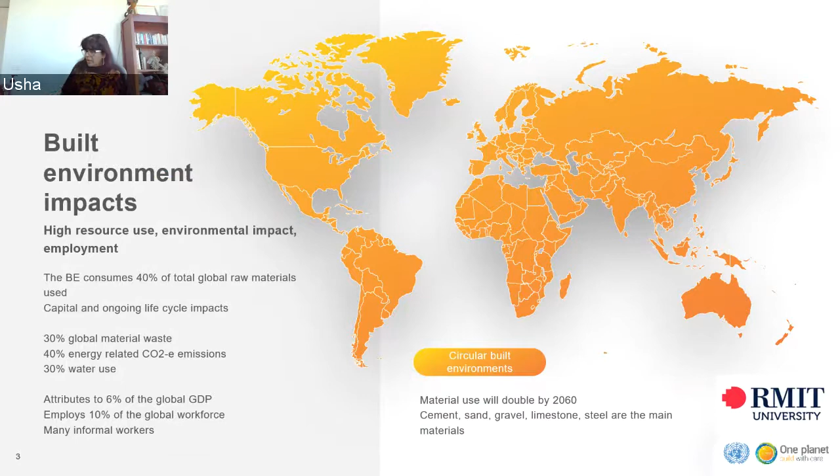So what does a circular economy actually mean? I seem to have trouble advancing my slides here. I hope you can see that now.

The circular economy is really about designing out waste, but keeping products and materials in the system that are already there, so we're not using virgin materials. I'm sure Veena is going to give you some fantastic examples of how we can use products and materials that are used in one system, reusing them into another type of system or product. The important thing here is to remember that we've just got the one planet, and therefore we cannot continue to pillage this planet that we've got.

As I said before, most of this material use is going to be in the developing regions of the world. But also, when we think about the Australian context - this was before the pandemic - the Australian population is expected to increase to 40 million by 2050, and there is going to be a mix of greenfields, brownfields, and greyfield developments. If we continue to build cities the way we have, horizontally rather than vertically, we will also be responsible for a large proportion of primary material use in the Australian context as well.

But if we were to move to adopting a circular economy lifestyle, what are some of these advantages? Clearly, the advantages are that we will not have to rely on production, consumption, and manufacture of materials through virgin resources, and this will assist us in eliminating environmental impact. But more importantly, it's also supportive of local growth, local jobs, and local economies.

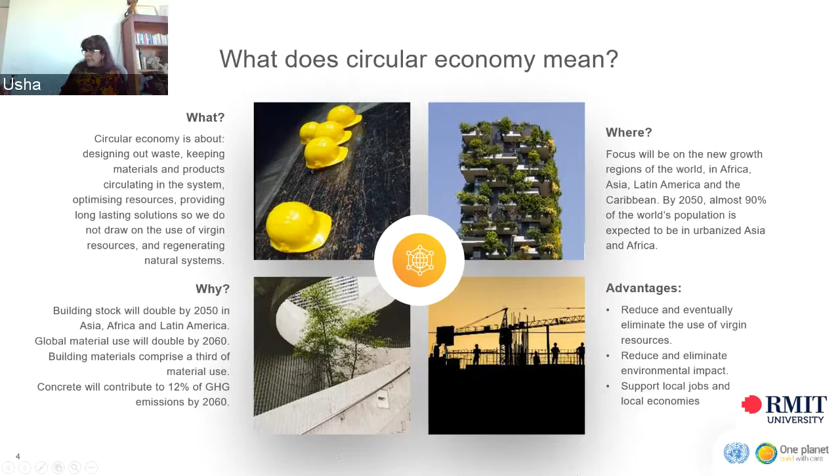There are many options available when you think about the built environment sector. Some of these options are mandatory, some are voluntary. Some of the mandatory options, for instance, are tying in with building codes, building regulations, various assessment schemes that arise out of the building codes, but also have been driven through voluntary schemes in the marketplace.

Nationally determined contributions, which is a reporting mechanism by countries through to the Paris Agreement, is another area, and Australia hasn't quite signaled the importance of the built environment in this, but the recognition of reducing impact of the built environment is certainly part of Australia's NDC reporting.

It's also important to start thinking about policies. Some of the measures towards low carbon economy, towards the use of efficient processes within the system, towards thinking about procurement practices, particularly by governments, thinking about what Australia is going to look like in a zero waste economy or in a low carbon economy.

These are all some of the things that are really important when we start thinking about some of the mandatory top-down driven measures. Voluntary options are often, at least in the Australian context, led by industry peak bodies, but there's also an increasing demand now coming from clients and consumers, and particularly the millennials and Generation Z are very conscious of the impact that we as humans are having on the planet.

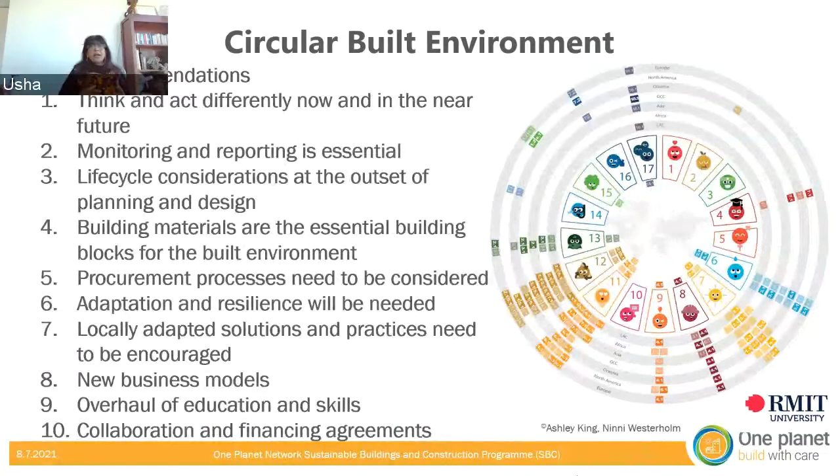And to support all this, also the importance of financing arrangements, new ways of sharing opportunities, new ways of financing, moving away from the old design, build type of models, particularly for the built environment.

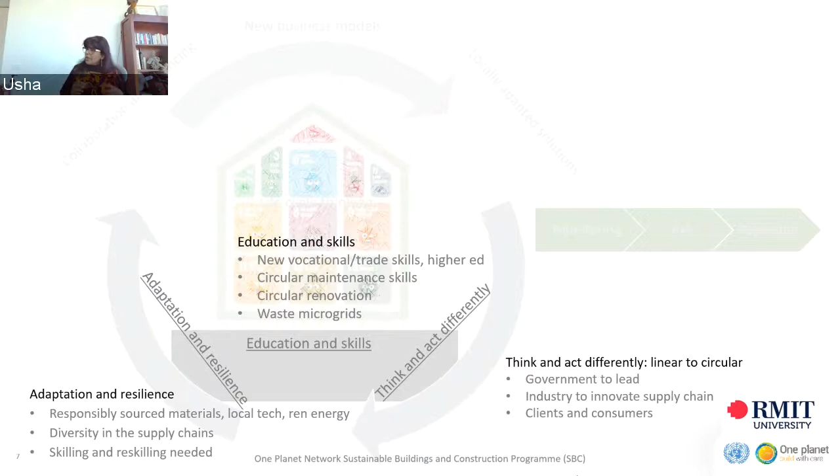I'm just going to run through these very, very quickly because I'm running short on time. So some of the things that point to or need to be considered when we're thinking about systemic change, moving from linear thinking to circular thinking, are around supply chains as well, thinking about how do we engage clients and consumers within this process, but also thinking about some of the leadership that governments can show us in the process.

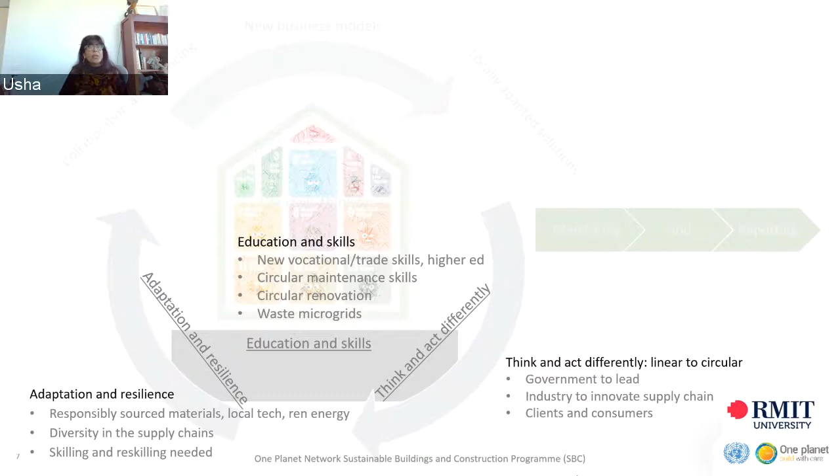In terms of adaptation and resilience, the role of how we tackle climate change, how we tackle people's responses to climate change, and the role that people can play in the process is just as critical. And this brings us to the importance of skilling and reskilling. This may happen not just at a vocational or higher education level, but it also needs to bring in professional development opportunities across the different disciplines that make up the built environment. And also starting to think about more of a repair culture rather than a throwaway culture.

In terms of life cycle thinking, I've talked about the importance of thinking about the full life cycle of buildings, but within this, the importance of new educational opportunities and reskilling people within this process is critical. And so turning attention towards new jobs that would be in the green building space, in the green skill space, is critical.

In terms of materials and the role of materials, it's really important to start thinking about bio-based materials, about using a cradle-to-cradle type of approach. So again, we are not using more chemicals within the process, so it's easier for us to reuse these materials at the end of their useful life.

In terms of procurement practices, again, moving the ownership models of owning into sharing. So for instance, companies that would be coming in and putting solar panels on your roof and taking responsibility for maintaining these solar panels - you don't actually own them, but you come to an arrangement of working with these companies to set up these systems and they take responsibility for ensuring that the panels work. There are examples of this already in Europe and in the Americas.

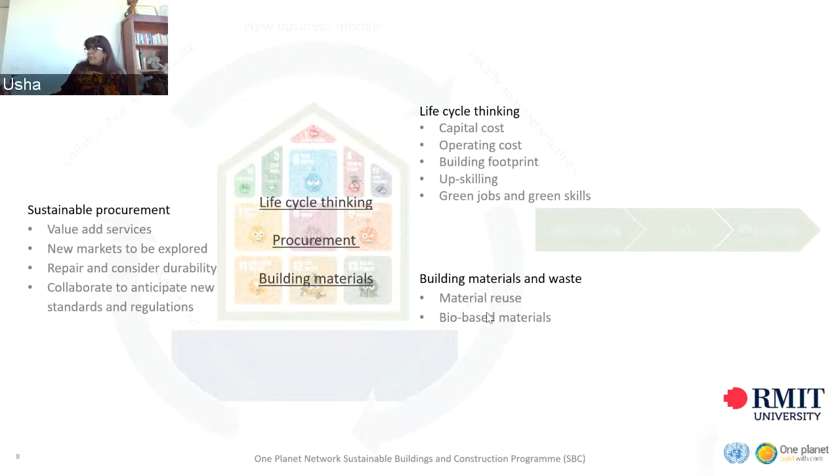And then in terms of locally adapted solutions, thinking about how we can support the local economy - this repair culture, the sharing culture, what role do new jobs and new opportunities create within that space?

And this, of course, lends itself to new ways of business collaboration, financing, and bringing in new ways of working - some of which we've already seen, like virtual ways of working - thinking about procurement models within this process as well. And the role of monitoring and reporting in this whole process is quite critical, because we need to start thinking about the Sustainable Development Goals as great indicators to enable us to get to where we need to go in the future. So, using this backdrop of the SDGs to start thinking about which of those SDGs will assist us in this journey.

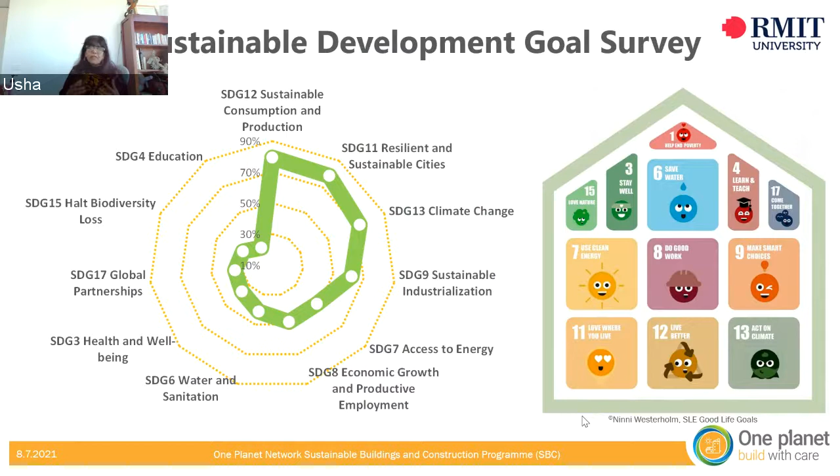The importance of SDG 15, which is about biodiversity, is also key. As we build more, we're actually taking away biodiversity, changing the landscape and the flora and fauna within it. This is a huge issue as we use more and more greenfield developments. And of course, there's the role of education in the process.

This exercise delved further into what those indicators were. There were 4 core indicators, actually 3, because 8.4.1 and 12.2.1 on material footprint are the same indicator across target 8 and target 12 within the SDGs. The role of recycling was considered really important, that's 12.5.1, and the use of local materials, particularly in housing, which refers to indicator 11C1 under SDG 11.

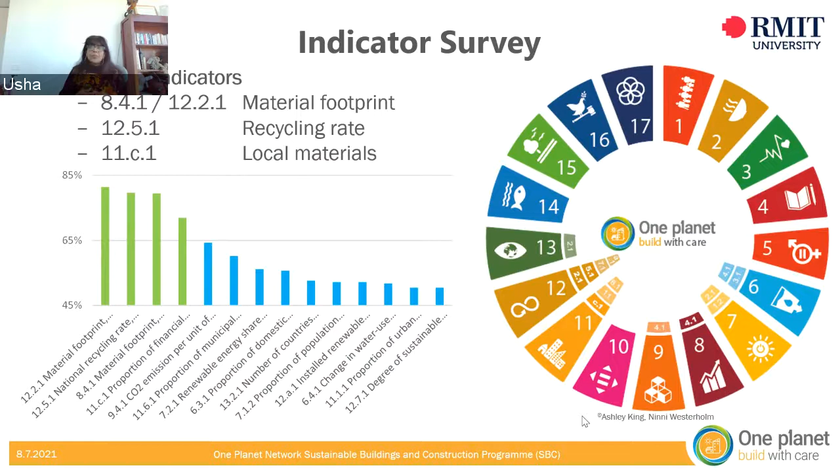As I said before, there's a whole host of other indicators relating to energy (SDG 7), water, the role of partnerships, and the importance of carbon dioxide emissions. These are the 10 secondary indicators, which I won't go into in greater detail, but again this signals the cross-cutting areas of the SDGs that are really important for us to consider when thinking about the built environment.

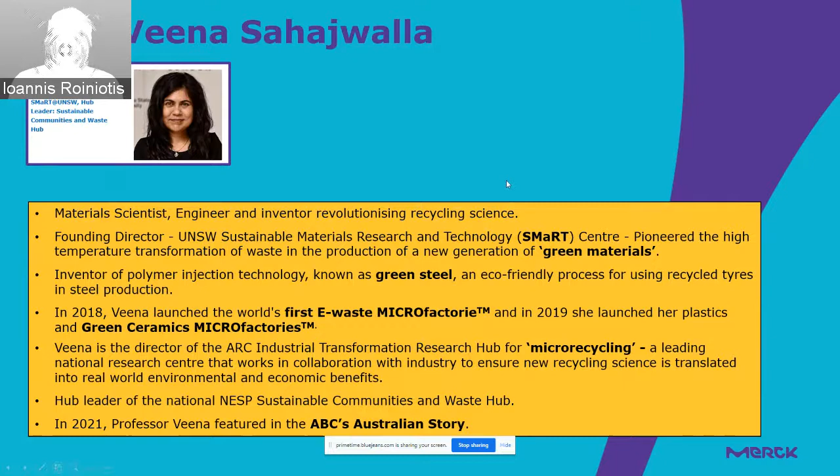What we're showing the world is that if plastic waste from e-waste can be transformed into a really useful consumer product like spectacles, then there are endless possibilities. One of the big worries with recycling in Australia is a lack of trust about what's actually happening to it. Having products that can be felt, tangible, and worn on the face shows people that their recycling is going somewhere, and we are finding solutions for it.

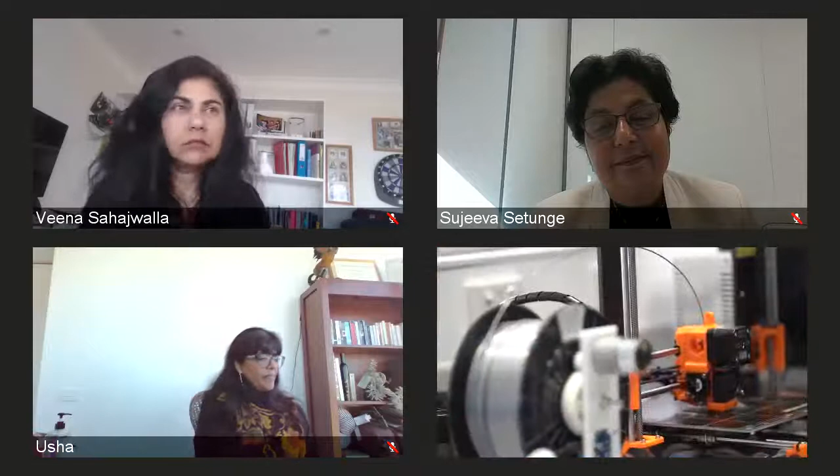The fact that we can produce these beautiful, high-quality plastic filaments out of waste and use it for printing means we're opening up a whole new economy, where microfactories become part of the supply chain, creating new products out of recycled materials. The opportunity is massive, and if we can get it right, e-waste is really critical, because if we can solve all the problems with that, we can solve a lot of other downstream recycling issues.

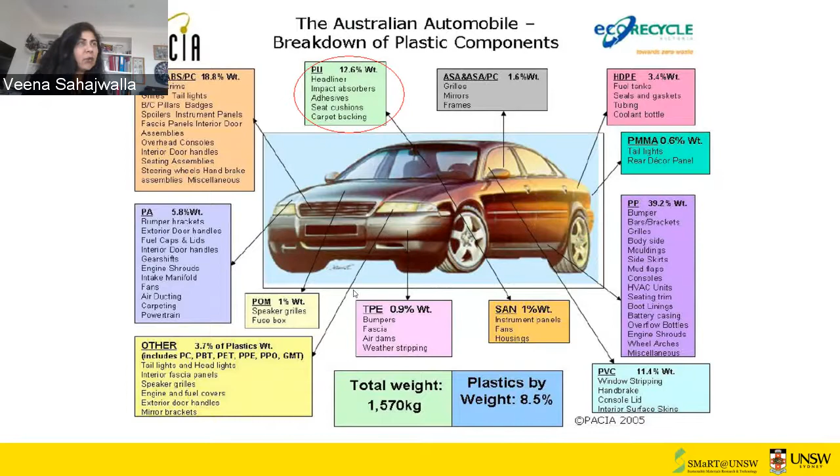we're looking at using, for example, waste tires in the process of making steel, using different kinds of materials like plastics that I was talking about coming from cars and electronics, and using that for remanufacturing. We've also shown that we've got complex mixtures of materials that allow us to reflect on where these waste materials can be utilized.

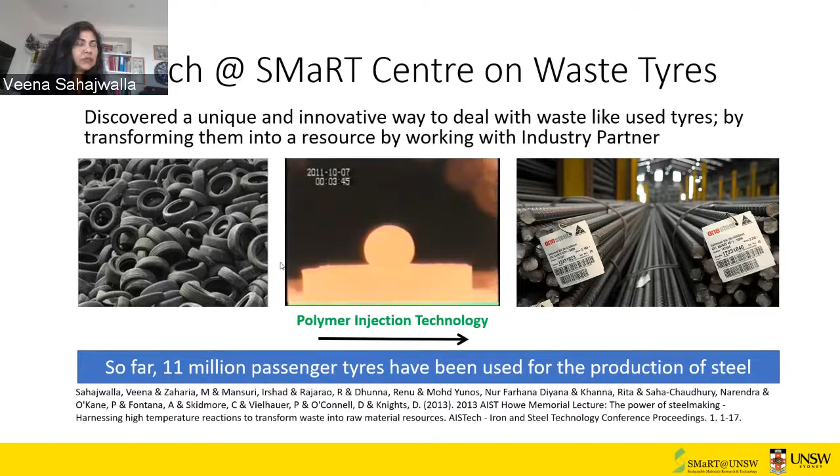So if we're talking about processes like what we're doing now with green steels, we're showcasing that we can use materials like tires and different kinds of complex plastics in the process of making all kinds of products that we've talked about here. So it's really about ultimately showcasing that we have to go beyond that traditional thinking of the 3 R's of reduce, reuse, recycle, because our wastes are complex.

Whether we're talking mixtures of different kinds of plastics, glass, rubber tires from cars, or different kinds of plastics, metallics and glass-based materials from our electronic resources, we need to reimagine how our products can be used in remanufacturing. This is where, for us, the exciting future has been over the last many years at the SMaRT Centre, showing that waste can be converted into value.

Which means we've got to look at all kinds of high-value products, and our consumer needs are going to change with time. The needs of our building industries, electronic industries, all of that will change with time. It's about being very flexible in the way we look at remanufacturing, but also recognizing that the input feedstock, if it comes from waste resources, can be put into remanufacturing to meet the requirements of end users.

So, if we're talking about things like e-waste, of course, our circuit boards are very rich in metallic resources like copper and tin. We know that the world has got plenty of these resources. It's about how do you transform them in a way that you can do it not just in a traditional way of putting it into a smelter, but rather looking at how we can develop decentralized small-scale operations that

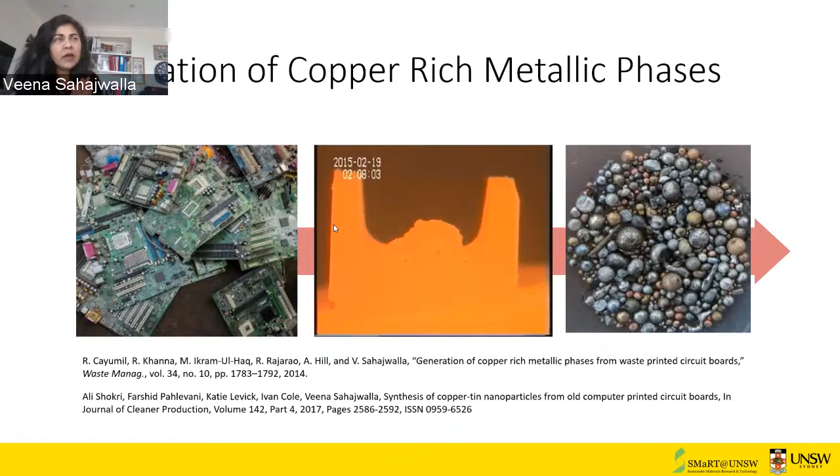This is where a lot of that conversation around energy storage comes in, what happens to a lot of batteries, for example, products like lithium-ion batteries. We know very well that they are extremely useful and contain very useful materials, like cobalt. So how do you harness these kinds of batteries in the production of important elements?

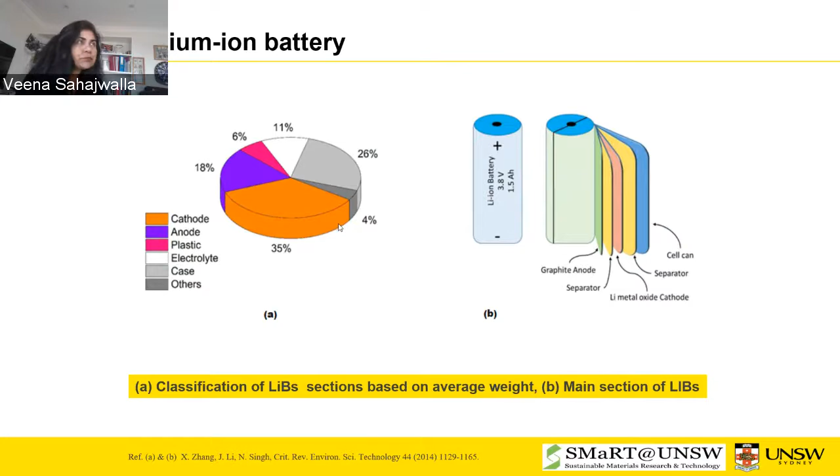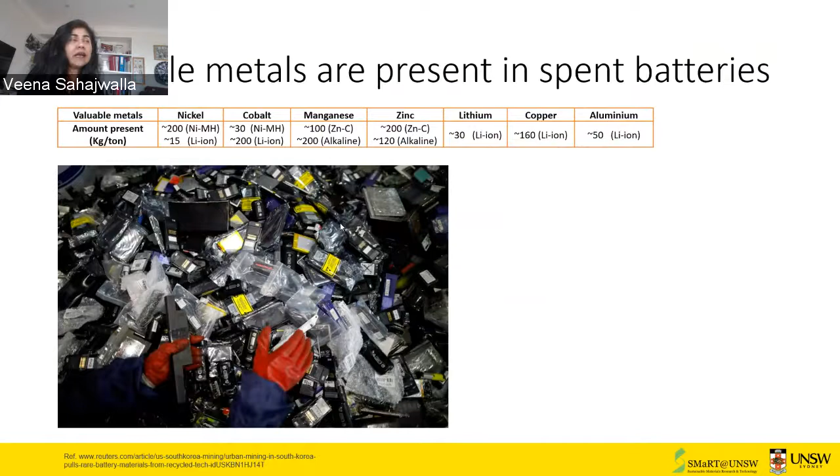I'll skip through a lot of these slides just to give you a sense of the fact that lots of valuable materials are really sitting at our fingertips in the form of different kinds of batteries, for example.

The SMaRT Centre really is all about taking that fundamental science, and we need to understand how recycling and materials transformation is going to play an important part, which means new recycling science has to be developed. We can't always assume traditional methodologies are going to work, particularly when we're talking about highly valuable materials feedstock right down at the micro level, whether present in our circuit boards or in our batteries.

We need these new technologies so that ultimately we can harness those materials. Micro factories and new recycling science, like micro recycling, provide that scientific and technological foundation, and those advances then enable us to achieve a greener future where we are very conscious and mindful that our materials really are finite resources.

Whether we're talking about electronic devices or just about all other things as part of our resource opportunity, including simple things like waste textiles, we need to be mindful that we need to ultimately deliver some of these solutions. And of course, green manufacturing and the work we're doing in this space is important.

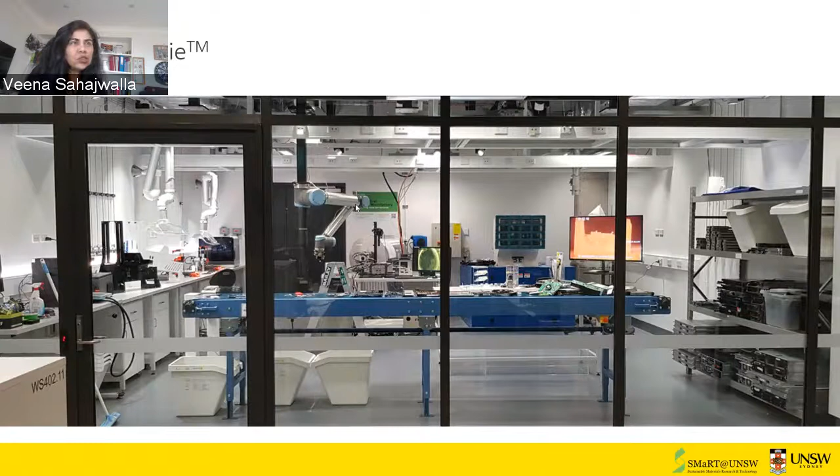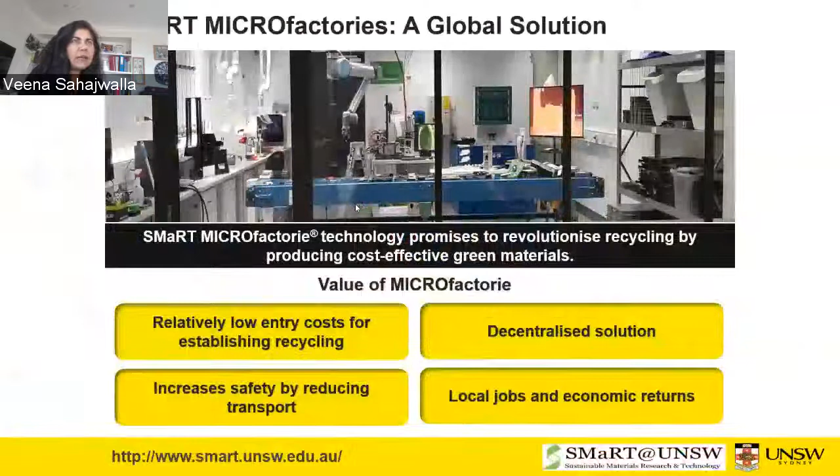I wanted to wrap up by showing you some pictures - I'll skip through some of these slides, but just to give you a sense of where these microfactories are. We've not only commissioned them at UNSW over the last few years, but this year have also launched our green ceramics microfactory outside UNSW in a regional town called Cootamundra. These facilities are enabling us to produce all kinds of products.

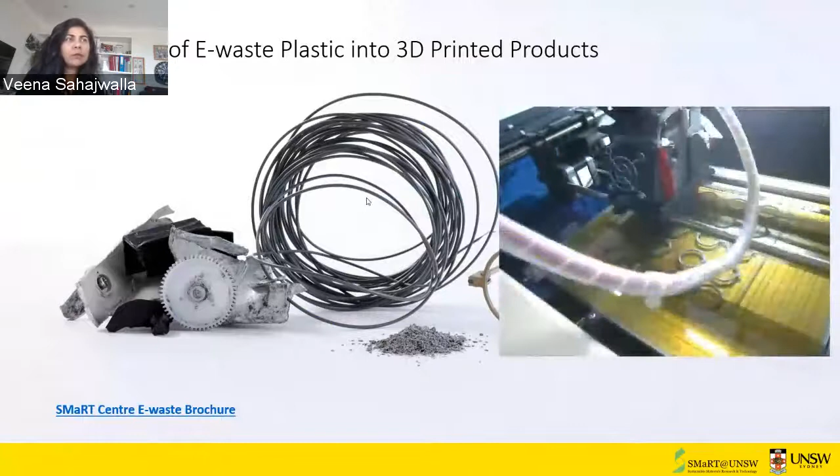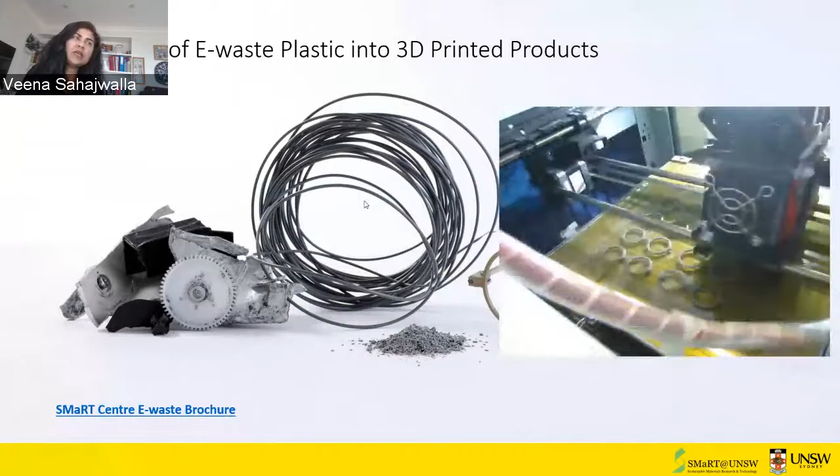Examples of what we do include simple solutions around conversion of plastics into 3D products that I was talking about earlier. All of that is feasible depending on the end market, but it's very much about customization, about creating what I like to call an EVP, an engineered value-added product, depending on the needs of our societies.

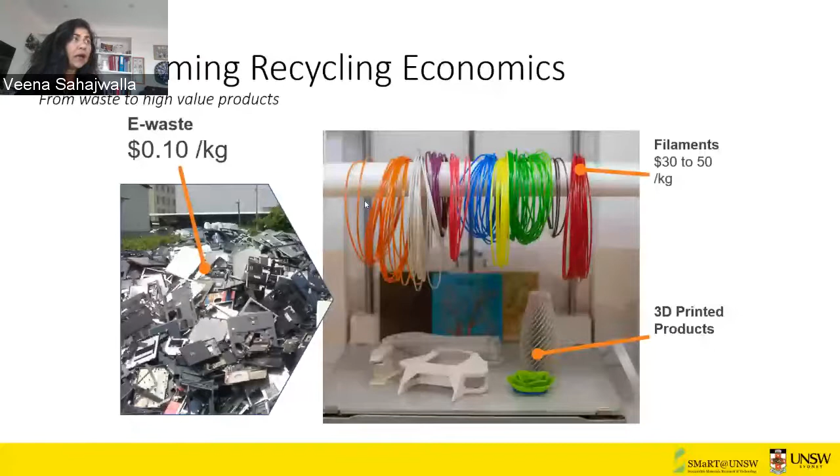So these are some of the solutions I've talked about, but I also wanted to leave you with a few pictures. Our pictures here reflect panels that contain, for instance, glass and textiles, and creating these green ceramics means you can actually put that back into end user application.

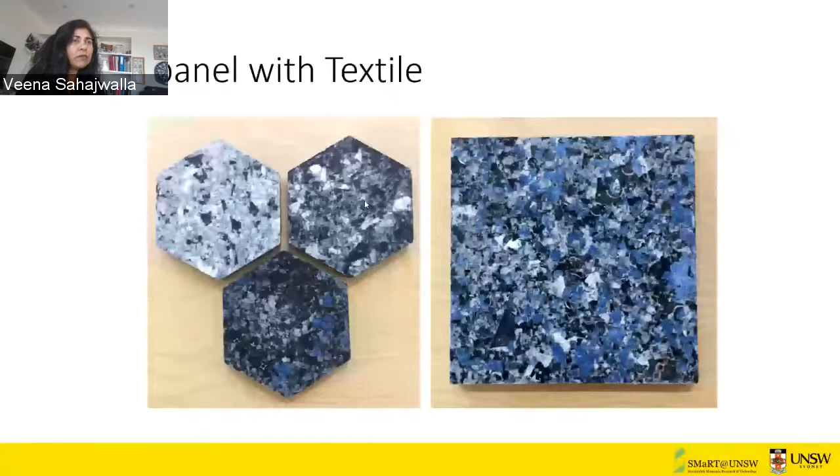Our collaboration with Mirvac, which we've released into the public domain this year, and some of the documentaries and work that ABC has showcased, shows that we can put these into actual applications - an apartment they've launched this year with products made from green ceramics. You see floor tiles, island bench bases, kitchen splashback, and wall tiles.

Look, I'm conscious of the time. I'll leave it at that, and certainly leave you with a real positive hope for the future, recapping that UN SDG 12 of sustainable consumption and production is very much possible. So thank you very much for this opportunity, and I'll hand it back to you, John.

Thank you, Veena. Thank you very much. I think everyone in the apartment business will be glad to use some of these recyclables, and it's timely. It's very timely. I'll just move on to our next speaker, our third and final speaker.

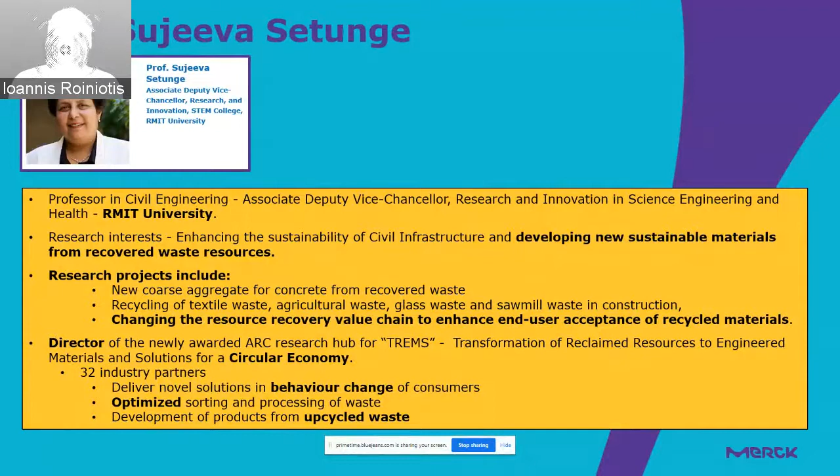Professor Sujeeva Setunge from RMIT University. Her research interests are vast, enhancing the sustainability of civil infrastructure and developing new sustainable materials from recovered waste resources. One project I'll highlight is changing the resource recovery value chain to enhance end user acceptance of recycled materials - changing everyone's mindset of accepting it. She's Director of a newly awarded ARC Research Hub, TREMS, working on the circular economy, with 32 industry partners delivering novel solutions in behavioural changes, optimising sorting and processing of waste, and developing products from upcycled waste. Again, keeping with our theme of a greener future. So over to you, Professor Sujeeva.

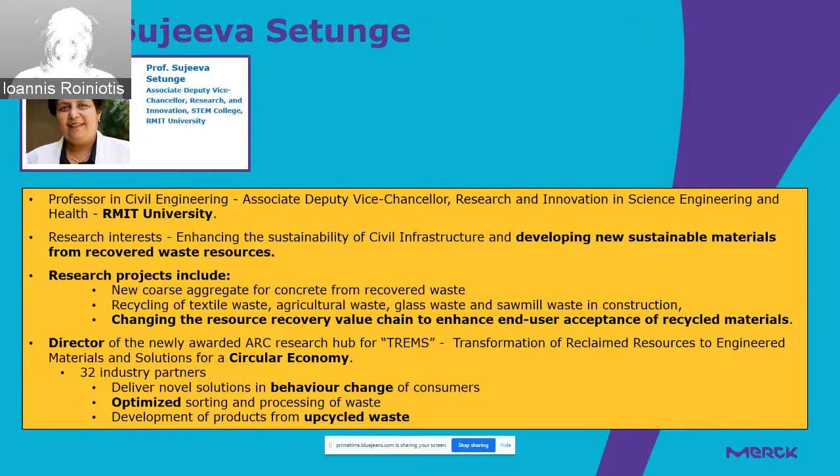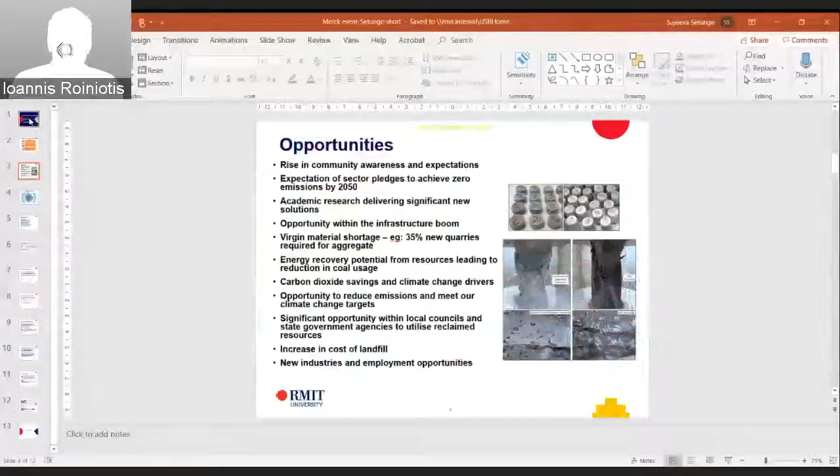You're on mute still. Over to you, Professor Sujeeva. You're just on mute, so unmute yourself and proceed. Can see your screen. We lost your screen. Go for it. Unable to see your screen. There we are. Yes, okay, can you hear me now?

Thank you, everything's perfect. Thanks, John, and thanks very much to Merck Group for organizing the Greener Future event. This is a fantastic initiative, and also great to hear from the first two speakers who have set the scene very well. So I'll move on to the topic straight away. It's really fantastic to hear the high-level overview from Usha about the global scene, and also from Veena about the scientific innovations and the great translation activities happening in the e-waste and plastic waste space.

So I will be covering the broader scope of resource recovery and circular economy challenges. My background is as a civil engineer covering the built environment and construction sector, where the need was clearly identified and presented by Usha. So we have a huge opportunity and also an issue.

Some of the challenges we came across - we ran 6 engagement events with industry in developing a comprehensive research program. Some of the major challenges identified by industry are the lack of knowledge about the volume and scale of the problem in detail, gaps in policies which Usha also touched on, minimizing waste and stakeholder responsibilities, effective tracking, collecting, sorting for a planned end use. So we have multiple opportunities for resource recovery and new solutions - what do we select, and the markets, loss of markets.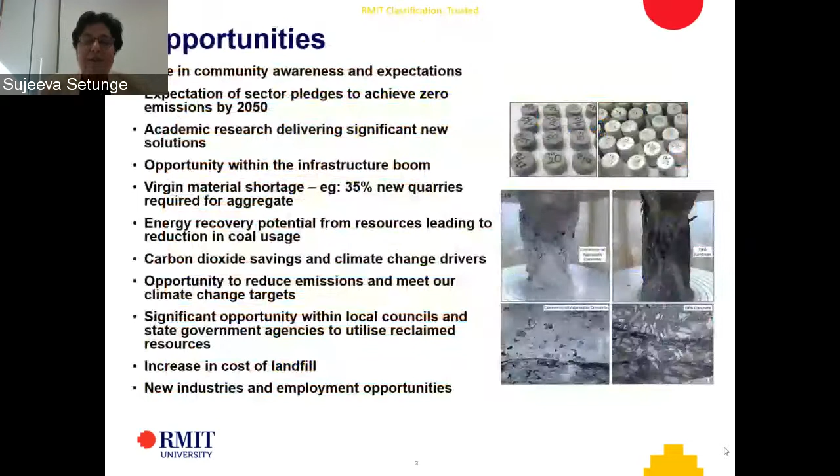There are emerging changes. We understand there will be newer challenges happening in the near future with export markets being reduced. Then you have environmental issues, leaching, environmental hazards associated with waste, lack of business models. So you can develop solutions and translate them, but how do we create a business model for the new product or solution? And then cost-benefit tools and enablers to ensure we have a circular solution translated well and implemented.

So when we started, we looked at the opportunities available. There's significant academic research delivering new solutions. If you look across the research space on this topic, you see so many solutions being developed. However, what we noticed is that the translation is very slow, and it's a huge credit to Veena that she has taken this to the full value chain, delivering market-ready solutions to the e-waste problem, and it's really fantastic to see the acceptance.

What we were finding is that in the construction sector, for example, geopolymer concrete, where we replaced cement completely with other additives, has taken 15 to 20 years to penetrate the market. Even when it has done that, the actual cost of the product is about 40% higher than normal concrete. So how do you compete in that type of situation?

However, there are opportunities. There's significant community awareness and expectations. All sectors have pledges to achieve zero emissions by 2050, an infrastructure boom, and whenever there's economic stimulus required, we see significant investments in the infrastructure built environment sector. So there's a huge opportunity for resource recovery and circular economy in the sector, and there's a virgin material shortage - for example, 35% new quarries will be required for aggregate.

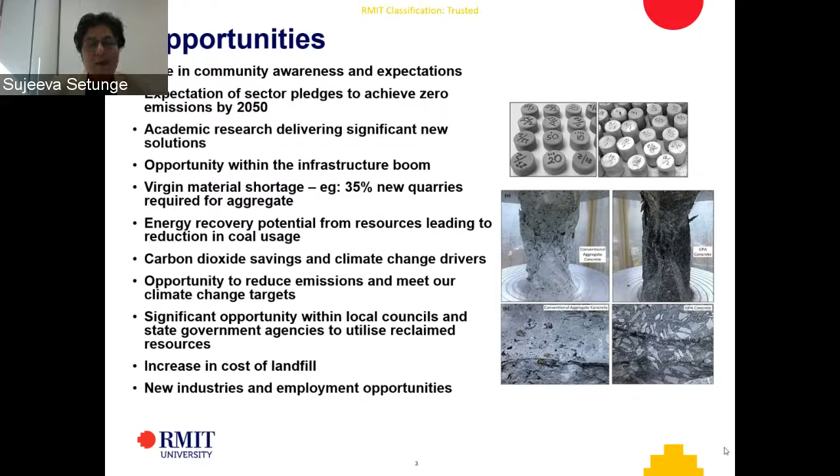So there's energy recovery potential from the resources recovered, which goes into reduction in coal usage. So there are a lot of opportunities which encourage recycling.

Considering all these, we developed a research program which covers 5 main themes. Theme 1 covers social change and smart design to minimize waste. Theme 2 is on processing, supply chain, and waste to energy. The third one covers solutions development, which is the space we have been working in for the past 10-15 years, developing solutions from recovered waste for applications in the construction sector.

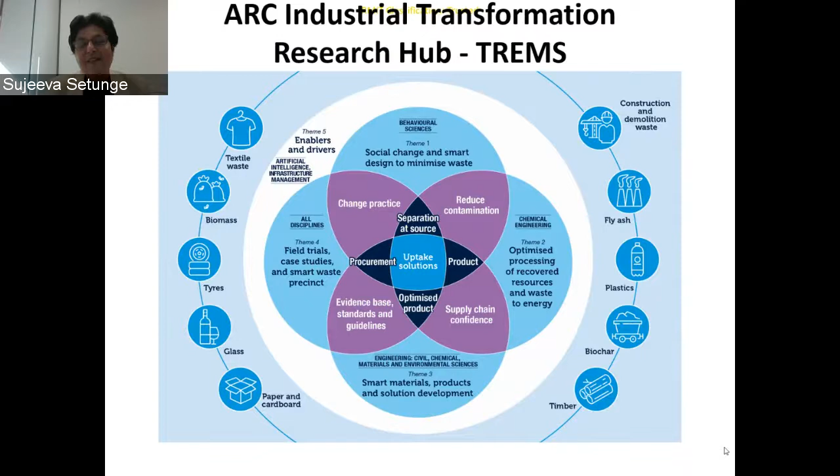Then we have a 4th theme where you do field trials, case studies, and then a 5th theme which covers enablers. You can see the benefits of the interconnected themes. When you look at the changing behavior and the intersection between processing, you see the reduction in contamination, which will enable easier recycling and upcycling of materials. Similarly, the social change and field trial intersection enables change of practice. So you can see the benefits of intersection of different themes.

Based on this, we have developed a research program in partnership with 9 academic institutions, and I'm pleased to say that Veena's team is a participant in the program as well, and Usha is a key CI from RMIT. We have 9 Australian academic partners, and 4 international partners, and we do have industry partners covering the whole waste recovery value chain, local government to private industry and peak bodies.

This has given us a fantastic opportunity to develop a research program which actually enables us to minimize waste. The first step of this is currently underway. We are developing a collaboration platform to track waste and material flows, working with 5 local councils who are key partners of the program.

We are also following on with some experience of Usha's team, where circular economy pilots have been conducted with local councils in other sectors, moving into the construction sector and looking at C&D waste, and also reuse of materials in the construction infrastructure sector from different waste generated from different parts.

We are also looking at policies for waste recovery, looking at what has worked internationally and how can we bring some of these into local practice, and how do we change behavior of consumers, what are the most effective practices, and then how do we develop smart tracking and waste collection methods to enable recycling and upcycling.

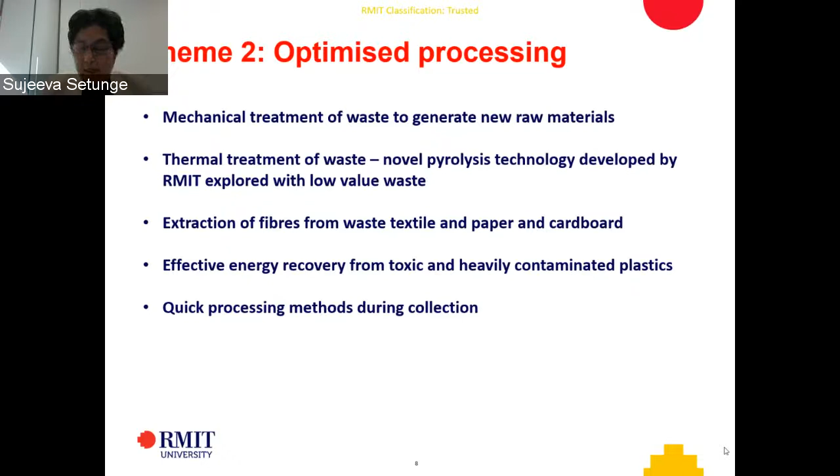We also have a fantastic new example where we have delivered a pilot plant of a pyrolysis technology developed by RMIT to convert low-value waste into energy with a low energy consuming process. Extracting of fibers, shredding, and some of these things we now also cover in our microfactory where it is already happening quite well.

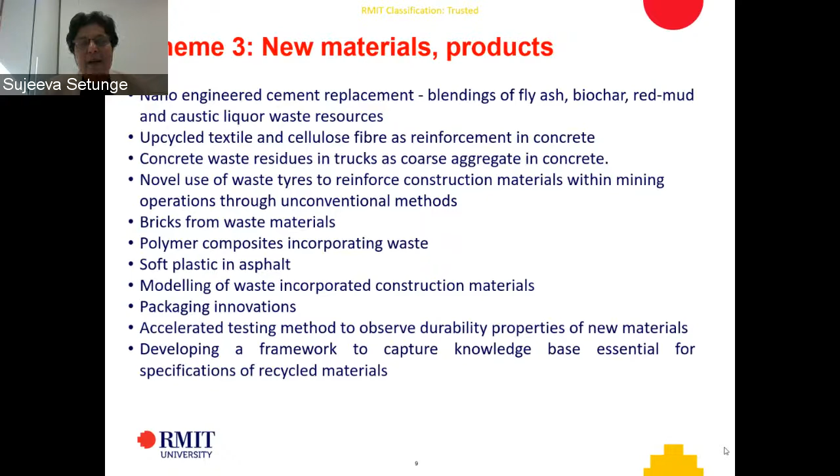In terms of new materials products, this is where our strength is. When you look at the 9 academic partners, we have 20 or so solutions which are developed at the laboratory scale, ready for that next stage of looking at field trials and case studies, which can be conducted in partnership with local council partners, and then developing enablers and tools which can quantify the benefit of using these materials to the consumer, enabling the translation and take-up of the solutions that are being developed.

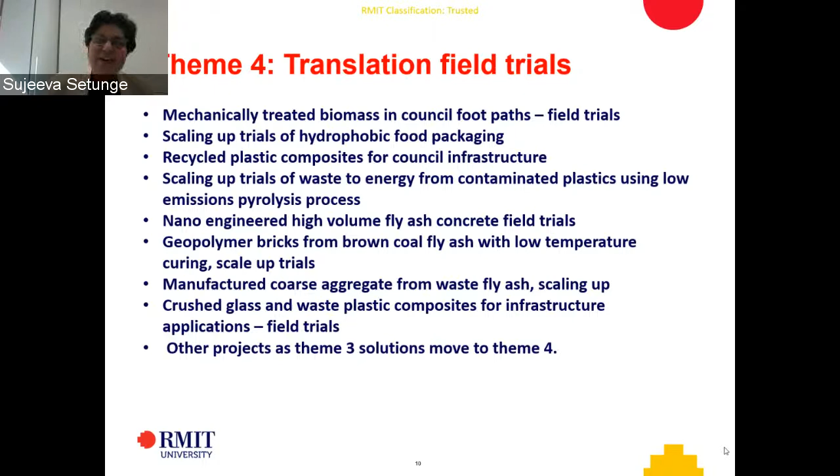So the research program has 3 different types of projects. The first is field trials of mature technologies which are already developed and tested in the laboratory by the academic partners. The second type is focusing on application for the research that is currently in progress in our institutions. And the third type are the blue sky type research, very similar to what Veena has presented, developing new technologies like green steel or cement-free concrete or the like.

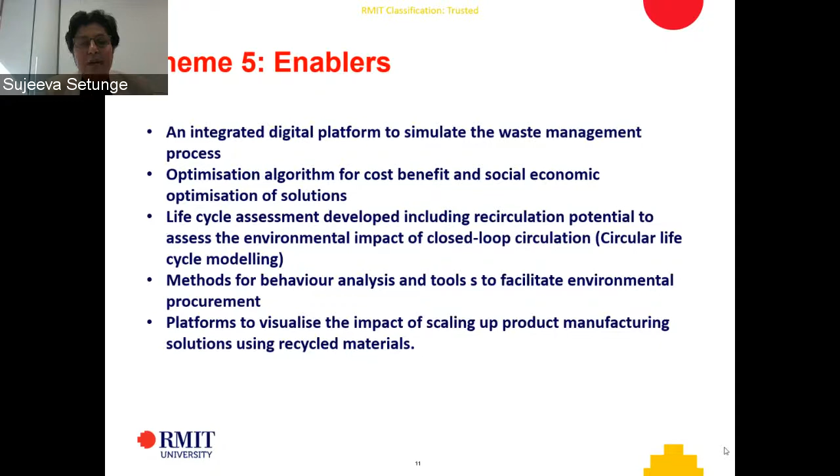So the enablers will be the tools and technologies which actually present not only the cost benefit based on economic considerations, but also socioeconomic optimization. So circular life cycle is a concept we have introduced and a tool is being developed in that space. So moving into, conscious of time, moving into the full cycle.

I just want to flag one new project. We are currently progressing on upcycling solutions for hazardous claddings. The Grenfell Tower fire has created significant issues of cladding, and there's a lot of claddings being removed from buildings considering the fire issues, and recycling or upcycling of these has been a major challenge. One of our CIs, Kate Nguyen, has been working on this project where she is looking at a number of different outlets for the removed cladding and commingled waste.

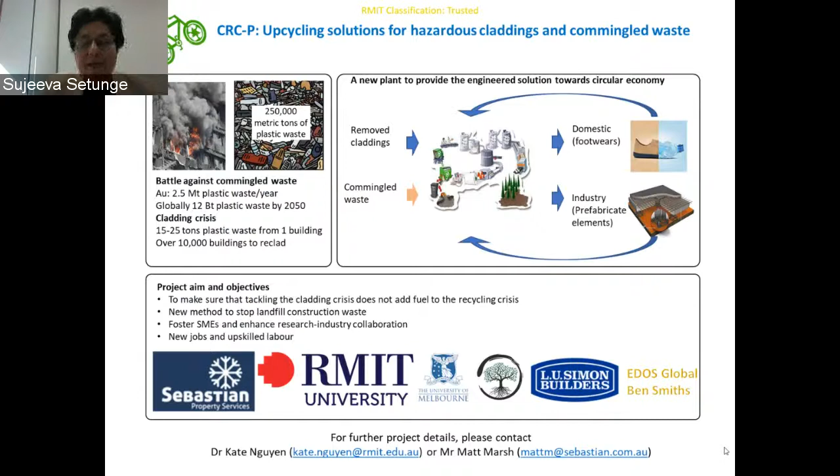One solution is quite lateral thinking: domestic footwear developed from the recycled cladding, and also prefabricated construction elements are another application we are looking at. I will wind up at this. Thank you very much, John, again for inviting us to present, and I'll be very happy to answer any questions.